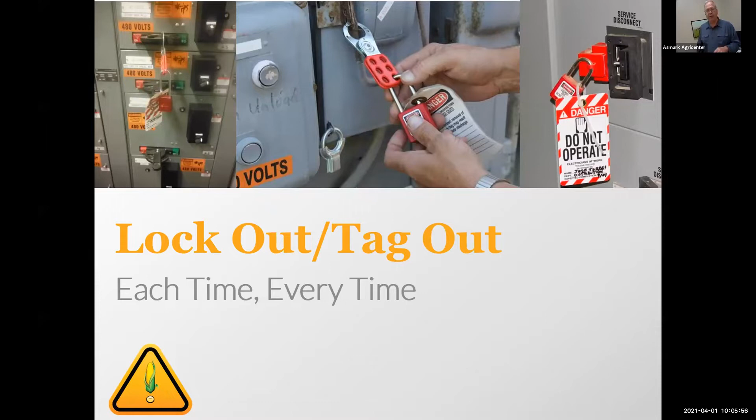So here we go. Lockout, tag out, each time, every time. Lockout, tag out saves lives. It can be used at home, it can be used at work, it can be used anywhere and everywhere. It's so basic and it absolutely makes a difference, so everybody can do it. So once again, this is my information. We're going to explain lockout, tag out, when it should be used. We're going to explain the concept of one key for one person. We're going to describe all the basic steps, working through all that.

It falls under OSHA 1910.147. It's about protecting our employees. I always worked under that part that says everybody goes home at the end of the day, and this works. It makes a difference.

We also do our written procedures. Once again, information—everybody needs to understand how the process works, and everybody's on the same page, so that when they see this happening, they all know what's going on.

It's affordable and very easy to do. It's not big dollars. It could be something as simple as if I didn't have the right thing with me—if I had a heavy duty zip tie and a piece of paper, I can make a lockout tag out. It's something that makes a barrier for something to be turned on.

It is mandatory for commercial and non-exempt farmers, and it is a best practice. It protects us against injury, against unexpected startups during service and maintenance, or anytime we might be working anywhere near exposed electrical. And it keeps others from turning machines on.

How common could it be for us if we're working on something and have to make a repair—we shut the machinery off and go start our process, and if I didn't secure it, how possible is it that someone could walk in and say, 'hey, we're supposed to be unloading grain,' and start flipping switches, and things happen because it wasn't secured? Then we get in trouble, and somebody gets injured. Lockout, tag out—it controls hazardous energy.

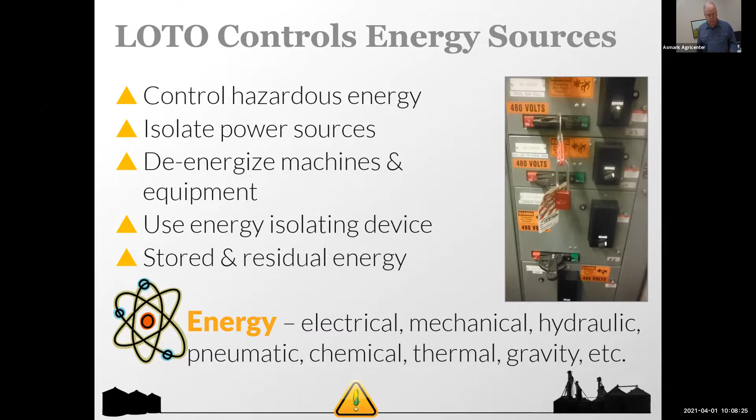A lockout device is defined as an energy isolation from a system, machine, or process which physically locks a system in a safe mode and prevents energy from getting to it. If I disconnect the electricity and lock it, I then prevent the electricity from energizing that equipment to make it move. That's what we're looking for.

So this is a tag out. Tags are our warning device. This tells us why that lock is on there. It's a labeling system—it can say do not operate, or power cord's locked out, or anything. The whole point is that something can't be accidentally turned back on when somebody's working on something or has their person in a dangerous situation.

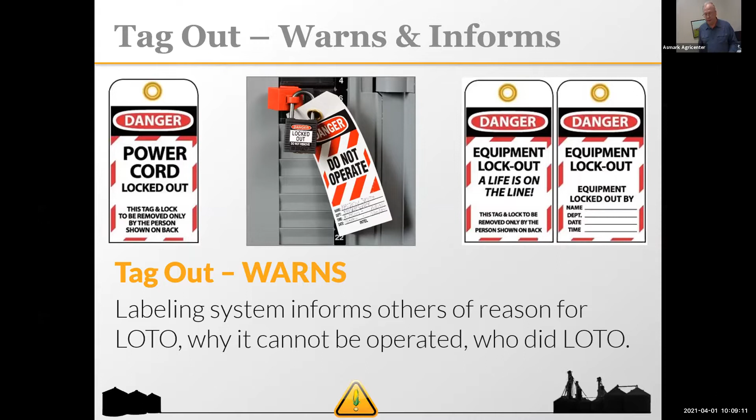It also says who did the lockout. We want only authorized employees to perform a lockout tag out. If I've got a person on his first day of the job who's just now starting to learn everything, he wouldn't be the authorized person to do the lockout tag out. It would be the seasoned employees, but they're learning it too.

We're going to train all of our employees. We want everybody on the same page. It's very critical that everybody understands when they see that red and black tag that there's a reason for that. We always use proper locks and tags, and we also have written procedures so that everybody's on the same page.

Every year, sometimes it feels like we're preaching to the choir, but above all, we want to review those procedures annually, because now and then we need to make protocol changes if systems change or we've changed machinery or there's something specialized with that. We want to make sure everybody's up to speed.

We also work under the auspice that one lock, one key, one person. I have my lock and I have my key. So if I'm locking out, I've secured it, okay? Nobody else can unlock that padlock except me. The importance of that is if I'm in a dangerous situation, or I've locked a piece of equipment out to work on it, only I can re-energize it to put it back into procedure, okay?

If I have a multiple person deal, if I'm working, once again, I come from the fire side, I'm the rescuer, so I may have 3 or 4 rescuers working in a situation. If I've got 3 or 4 people working in a bin or around machinery, there's going to be 3 or 4 locks, depending on how many people are going to be on that device. It will not get re-energized or reactivated until all of the people are back and accounted for. So I hope this helps make things understand how it's going. But once again, it's 1 lock, 1 person, and if it takes a dozen, it's a dozen, whatever it takes. That's critical.

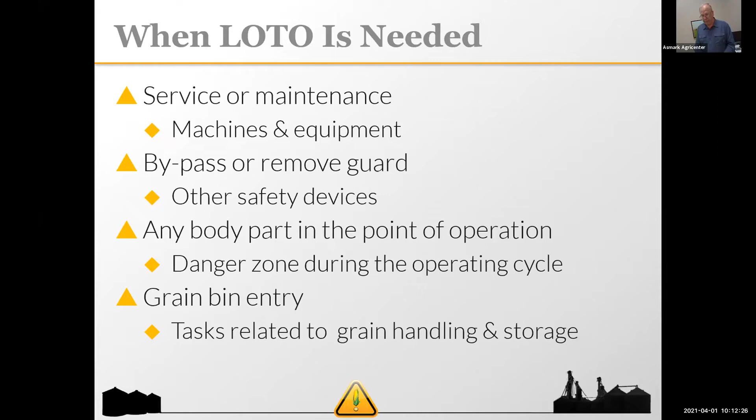If I had to put any part of my body in a position where it can come in contact with pieces that can move or anything like that, lockout, tagout works. And especially in grain bin entry, if we're going in, we're going to lock out, tag out, because our first goal is to stabilize, make the grain stable, so that machinery cannot accidentally turn on and make grain move and get people into danger.

No lockout, tagout, limited exceptions to not using it. We're not going to go into that because we're going to work on this, but it could be as simple as if I had a drill or something working on an extension cord, I can unplug it. And as long as I maintain control of that cord, I've essentially done lockout, tagout. And I dated myself in a program one time when I said, how many of you unplugged the drill when you changed the bit in the end of it? And a student said, I didn't know drills had cords. So, I've once again dated myself. So, and I am sometimes referred to as the poster child for everything you should never do. So that's why I'm in this.

We want to do that. Or if I have something that cannot accept a lock, once again, something that's got a cord or something, but I can control it, lockout, tagout each time, every time. We just get right into the habit of, if this has to happen, this is where we go, and this has to be done before we move on any farther. And any employee, if they see this trying to be short-circuited, has the obligation to each other to call it out and stop the process.

So if we're going to do a lockout, say we're at a process, we've got to go in and change a motor on a system, adjust belts, who knows. We have to identify the energy sources that we're going to lock out. And then we also have to notify all of the people who are affected by this lockout. If we're going to shut down an unloading system in a grain elevator or a processing plant or in a factory where you've got machinery working through automation, if I've got to shut part of it down, it's probably going to affect everything downstream from that. So everybody needs to know that this is going to happen. And that way they're all affected, and everybody realizes that from this point forward, they're doing this.

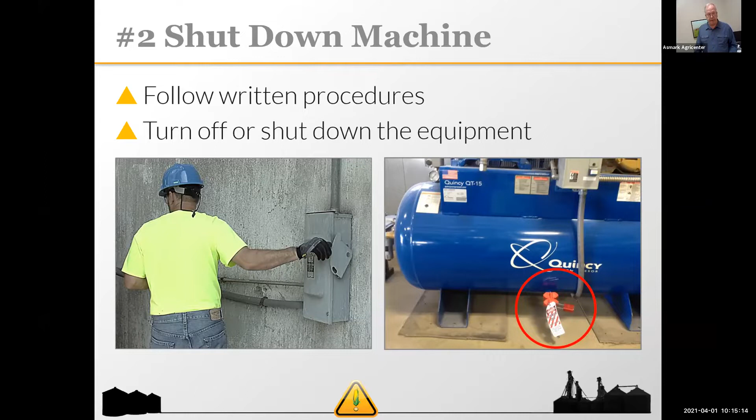If you look at the slide on the right-hand side, you'll see they're bleeding air pressure off of a tank from a system run by air pressure, stabilizing and locking the machinery out. So once again, why are we looking away? We very much do not want that arc. If it should arc, we don't want it to blind us or hurt us.

Now we've isolated it. Number 3 is to isolate the energy source, disconnect any and all energy sources. We can put a chain on something if it's a valve or has a wheel. On the right-hand side, you can see we're bleeding pressure, releasing stored energy. The stored energy could be anything like grain in a leg—if a leg gets plugged and you unplug it, it could run backwards, which is an example of stored energy where things can happen.

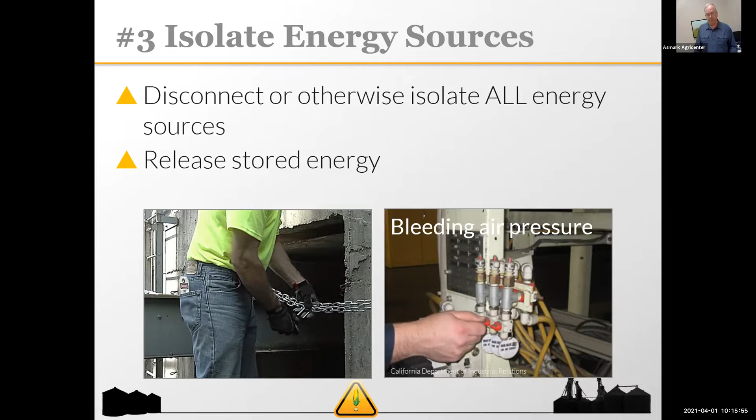Here we are once again, mechanical. Things are under tension, hydraulic under pressure, pneumatic under air pressure, and then just plain gravity pulling down on the items. These are all stored energy examples that we need to be cautious of and aware of.

Other examples: battery backups, springs, struts, like on vehicles, capacitors that can hold electricity, flywheels just from their momentum, gravity, hydraulics. All these items are energy that can have stored energy.

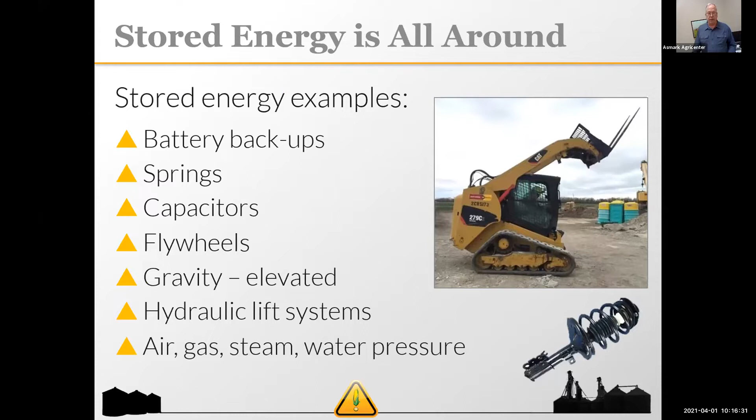So we want to release it, dissipate it, and once again, grounding, repositioning, bleeding and all that. We want to get that pressure taken off so that it becomes a neutral, non-issue.

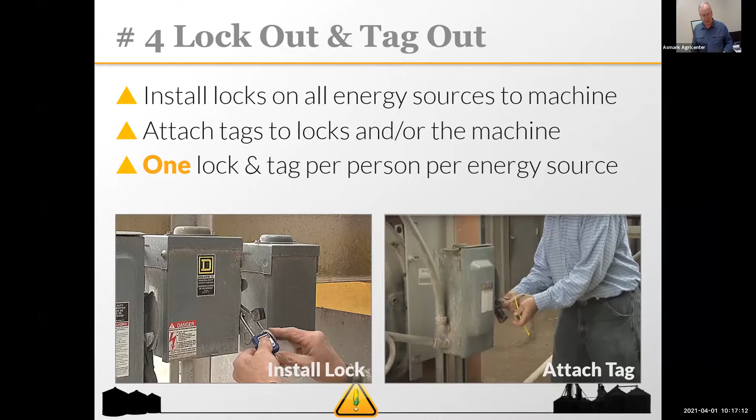So then we install our locks. This is number 4 in the procedure. We install the locks. In the newer systems of today, the tag is actually a part of the lock itself, which helps us identify it. We attach the tag to the lock saying who locked it out, why, and what's going on. One lock, one tag per person—if I've got multiple people, we're going to have multiple locks.

Then try it: make sure that if we've locked it out, we have stopped the energy source, attempt to restart the process, and verify that it's locked out. That, in industry, needs to be watched very carefully.

Once we've proceeded with our lockout tagout and know that everything's stable and secure, we can begin our maintenance work. We go in, make the repairs, make the adjustments, whatever it is. We come back out and account for everybody and all of our tools. Everything is in place, the equipment is back intact, and then we can start the restart procedures.

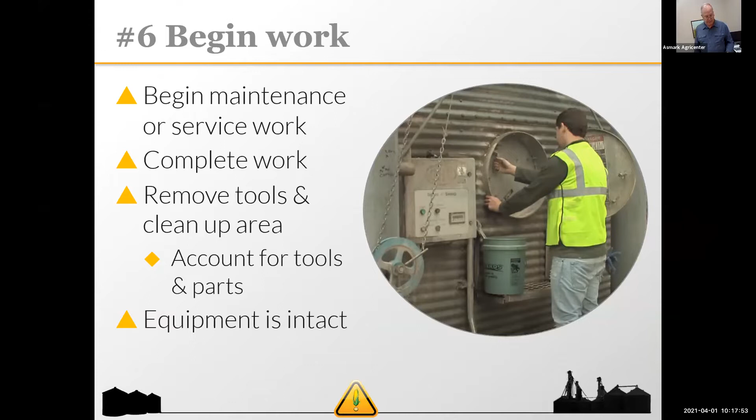We notified everybody when the equipment was going to be shut down and inoperable. Now that we've applied everything, we could then go back and start re-energizing and bringing everything back online. So it's really a procedure.

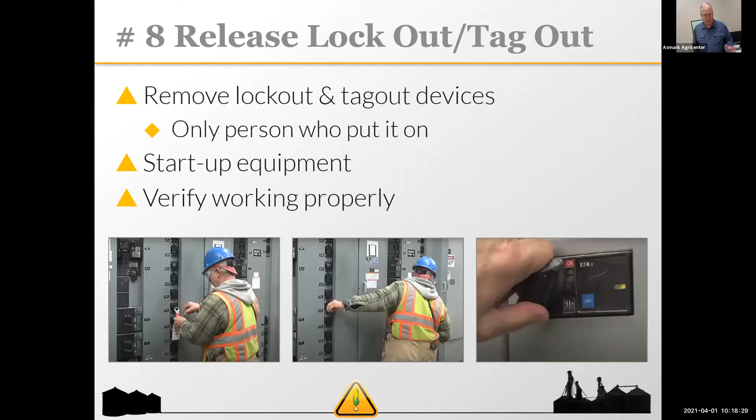Once again, we notify, we do the work, and now we're notifying everybody that we're coming back up. We ensure that everybody is in a safe position so they don't get surprised by the startup—everybody needs to know. We take off our locks, which starts the equipment, and verify that everything's working properly.

The other thing that's very critical here is lockout tagout devices are specific for lockout tagout. We don't use padlocks from lockout tagout to secure our lockers or anything personal. These are in place for a reason, used specific to this. They are provided by the employers, standardized in their colors and shapes, and very durable for indoor and outdoor situations. We want to understand that they're tough, but most of all, specific to one job only.

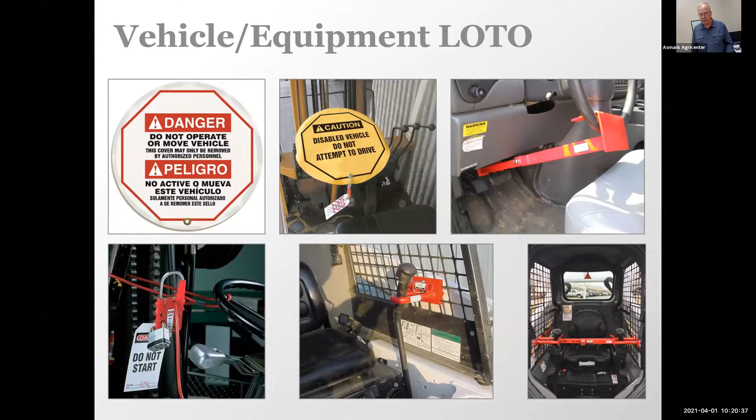Different devices here that lock between the pedals. You can see barriers that say this vehicle is out of service, and it's very obvious. Lockout and tagout devices are very durable. They are standardized in print and format, so every time we see it, we recognize and understand exactly what it is.

They take a pretty fair amount of force if somebody tried to tear it off. Some of them are not reusable and are self-locking; the unlock strength is 50 pounds on that. But the point is, if it's there for a reason, don't mess with it, and the person who put it there is the one to talk to.

So once again, our control program: lockout, tagout procedures. We want to train our employees so everybody's up to speed. We do periodic inspections, enforcement, written procedures, and full employee protection. That's our bottom line, protecting our people because they are our biggest asset and resource.

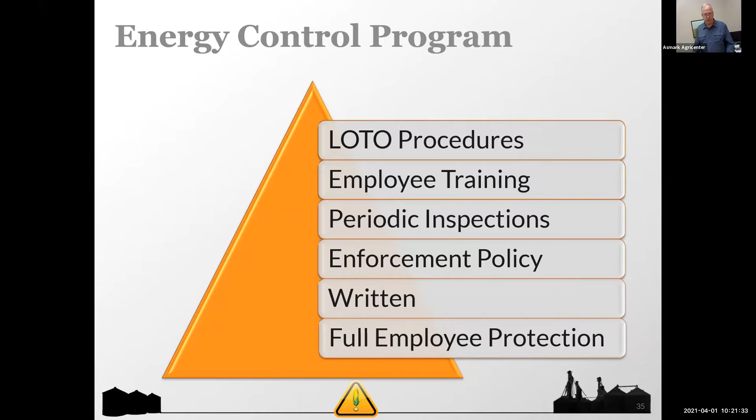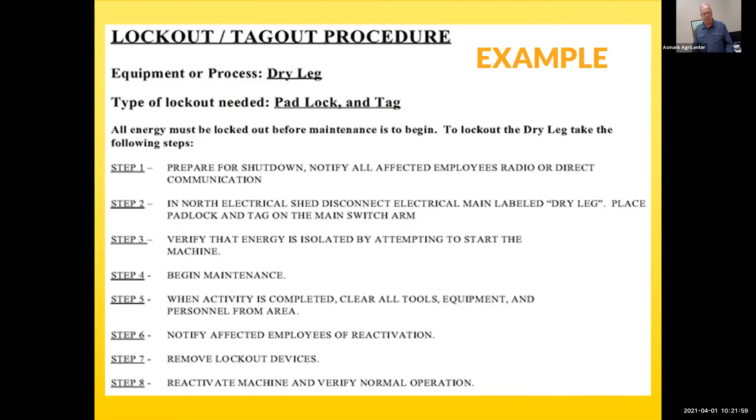Once again, in the North Electrical Shed, this is just an example of a lockout tagout, showing what they're going to be doing, where and when and how. All workers need to be trained on this, so everybody's on the same page, whether it's a 20-year employee or the new kid on the block. It all plays that way.

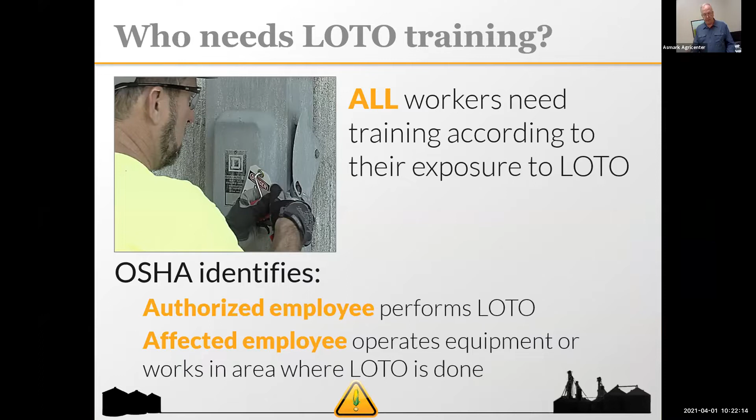Authorized people, affected employees, this all plays into it. Whoever works with it needs to know how the systems work, however they are specific for you, your operation, your business, whatever. Okay, procedures, we're just reiterating here once again.

Once again, we train our personnel on the areas where they're working. Understand, this is how you would lock your part out here. Recognize the hazard, the energy sources, the types and magnitudes, how to isolate, and what method or means I'm going to use to do the lockout, tagout.

Do I use a padlock? Do I use a blank? Do I use cables? What different things do I need to be able to do this?

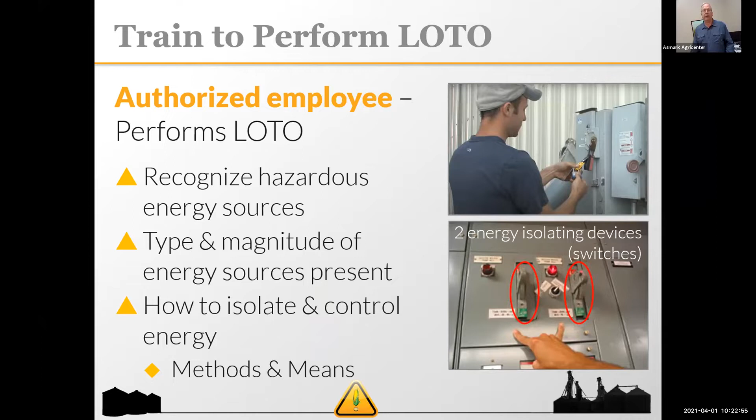We also want to retrain, say somebody's in a job position and takes a different position, moving into a different part of the facility. We would then want to train them on what lockout, tagout things they need to do specific to where they're working now. So it's retraining anytime a job would change.

Periodic inspections, once again, we're inspecting our properties and all that. So we may have to do lockout, tagout when we're inspecting part of our equipment and things like that. So all these play right down here, identify and correct all those procedures.

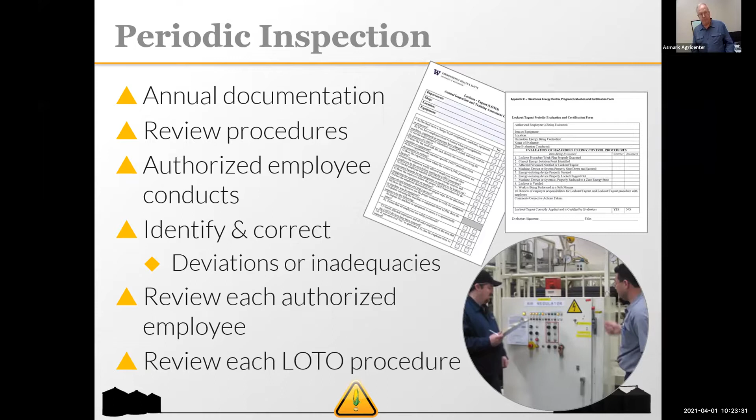So why lockout, tagout on the family farm? Once again, a lot of farm injuries happen out there. We have a father and son who discussed the need to check a cross auger on a bin.

Nobody thought about lockout, tagout. So the dad went to check the auger and didn't like what he heard. He got on top of the bin and stuck his arm in the auger. The son decided to start the auger and the father lost his forearm. Once again, bad communication, no lockout, tagout. A simple padlock would have saved this man's arm. It's just that simple.

So lockout tagout is a small change, but it has a big impact. It doesn't take much to do it. It's not expensive, but everybody goes home, and that's our bottom line. That's what we're after.

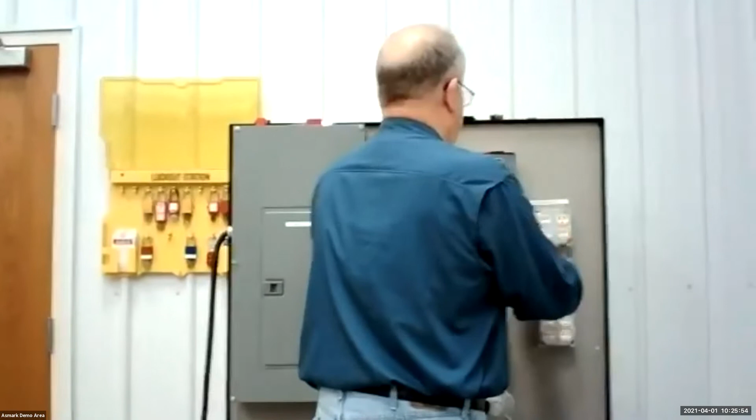What we're demonstrating here is a device in a machine operation. We've got a dump pit auger and the grain leg. So we're going to start them up, and we notice that we've got power. So we shut it down, we stop it, we come over here to the motor disconnect and pull this down. I install my lock through the part where the arm can't move.

And once again, that was a bad procedure. I should have been facing away, that's my call. So once again, I go here and I lock out, tag out. Now I try it out. Nope, I didn't get everything. So now what I've got to do is go to my second point of entry.

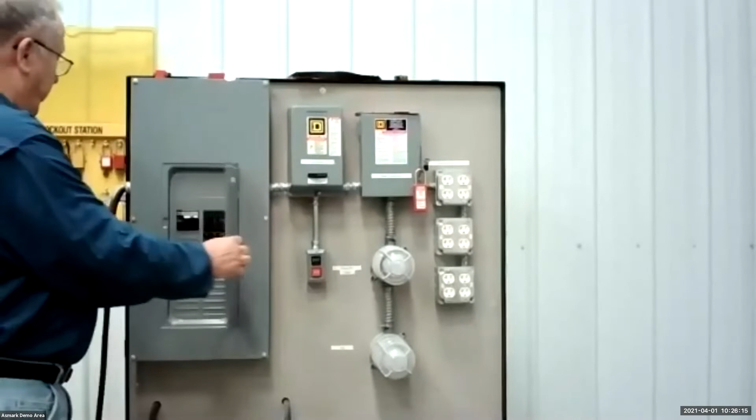I go in here and I shut off this one, I think it is. My lock device goes on the breaker. You can see here, it goes on snugly like so. This comes over, my padlock goes through here. Notice the padlock has a tag, it says locked out. So we now have everything taken care of, our energy sources.

So we now have everything locked out, and now procedures can go on from there. This pretty much concludes lockout, tagout. Once again, I want to reiterate to everyone that it's easy, it can be this simple. This is what saves lives. This is also inexpensive, and keep everybody on the same page, because the bottom line is everybody goes home. So thank you for your time.

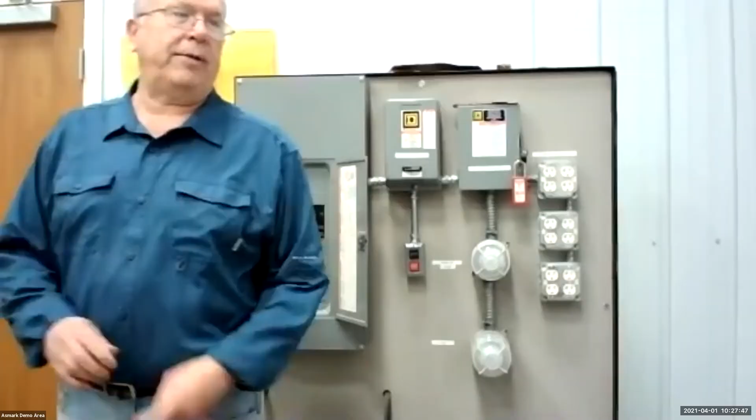So there's just a general comment on one of the pictures about the person should be standing to the right, not the left, of a particular breaker, just in case the door blows off, his arm would get hit. Sorry about that, be something like this. Okay, my mistake, that was my mistake in the presentation. Sorry about that, good catch. Nope, that's okay, everyone. And you know what, that's why we're all here together today.

Somebody was asking, does anybody else have a hard time getting employees to use a lockout tagout system? They said their crews in small groups usually have to go through it two to three, four times, or ask to convince them to do it. And somebody brought up discipline. What are your thoughts on that, Dave? If they ever lose a coworker, or if I was the son and my dad lost his arm, lockout tagout would be very, very, very important to me. So it may seem like you're just preaching to the choir, but keep preaching, because the safety of your employees is critical, and you need to make it as stringent as you need to. But above all, we just got to get them to buy in, because it's their lives and their safety, and it's just that critical.

What do you think about the discipline part? I would leave that up to the companies themselves. If I've got a person that just doesn't buy into it, I'm going to train them till they get sick of it, till they do it. So I'm not going to say discipline is up to them, but I'm going to train them to where they understand my expectation is you are going to do this.

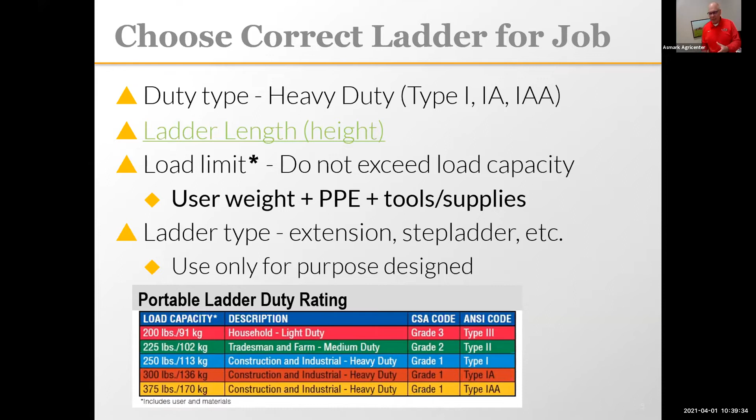Ladders are designed for a certain purpose. Our ladders are designed to take vertical loads, as you see on this slide. They are not designed to take horizontal loads, so we don't want to see a ladder used horizontally as a scaffold or a pickboard, something of that nature.

We also will look at step ladders. We're going to see where people like to use step ladders incorrectly. They try to use them as an extension ladder. The step ladder is not designed to be used as an extension ladder. It's designed to have the spreader bars locked out and used as a step ladder.

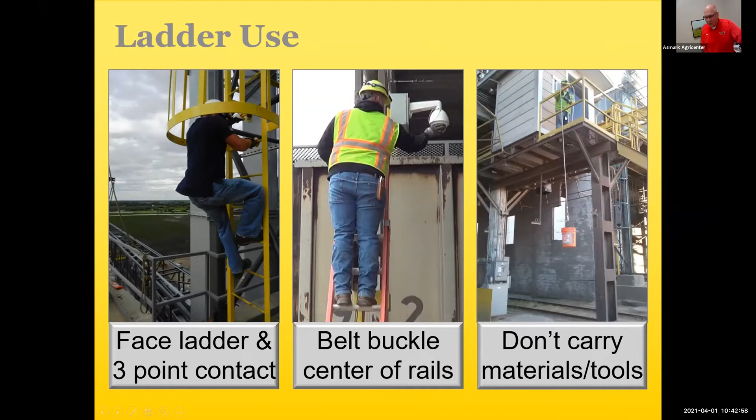Carrying tools, we lose that 3-point contact and grasping control if we're grabbing a bunch of tools in our hand, because now only one hand can be used. Consider a 5-gallon bucket, put your tools in there, and once you get up there, haul it up. This is a great picture because you're behind a guardrail, so you're protected from a fall. But also consider the use of tool belts.

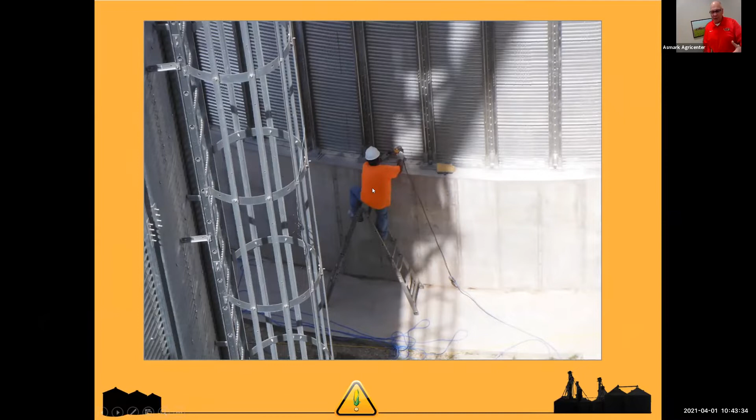Here's a good example of working on a grain bin where we've got a step ladder, and probably not the right ladder to use for this situation. The reason is he can't do his work properly while facing the ladder, so now he's using it incorrectly, depending on the type of step ladder. Some step ladders allow access from both sides, but that's determined by the manufacturer. So we should consider whether to use an extension ladder instead. Also, we never want to straddle a step ladder when using it, because we lose stability when we use the ladder in that manner.

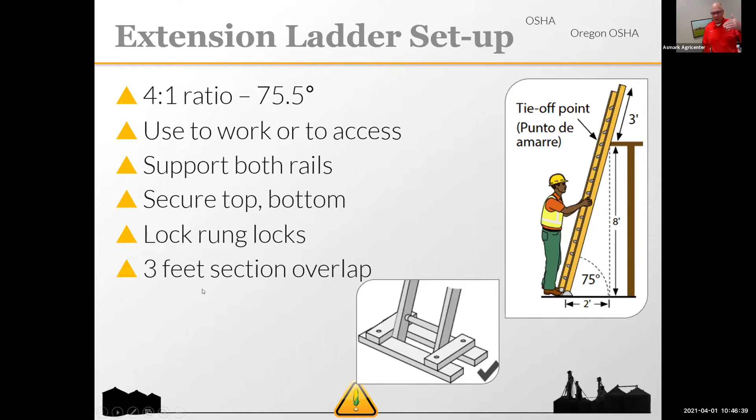If we're using an extension ladder, we want to make sure those rung locks are locked in place, both of them. And if we're using the extension to access, we're going to have a 3-foot extension, and the two pieces should overlap at least 3 feet so we have good support. Usually your ladder labels will tell you where to go on that overlap of your two sections.

So here's the 3-foot extension I was talking about when using the ladder to access - I've got something to grab onto. Another thing we want to make sure of is once we get up on this roof, we've got fall protection for that worker once they're up there. They make nice devices where you can walk through your extension ladder with a locking gate that automatically closes behind you and gives you fall protection - guardrails on the side, that kind of thing. So making sure we have fall protection if we're using that for access.

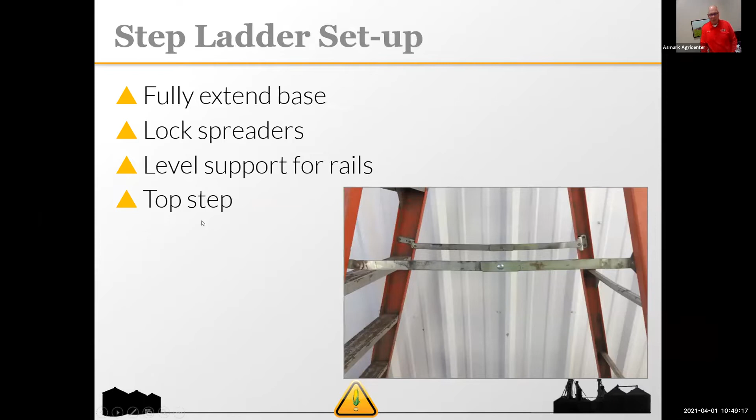Okay, our step ladders - we want to make sure we fully extend the spreaders. We never want to step beyond the top step of the ladder. We'll show you what we're talking about when we look at our demonstrations.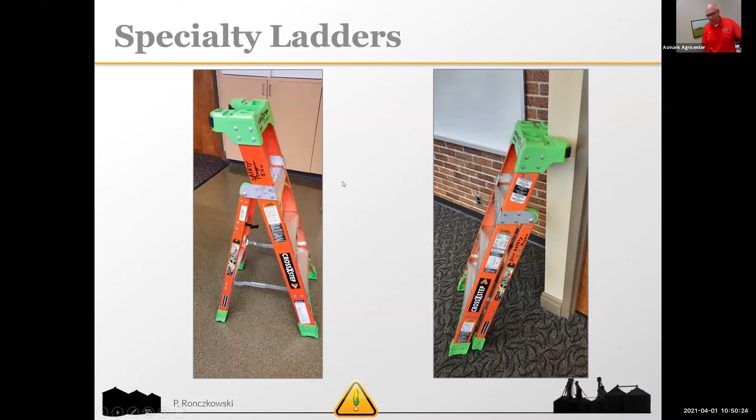Now I show you this one because there are special purpose or specialty ladders out there. This is a type of step ladder where the cross step can be used as an extension ladder, as you see here. It's designed to fit on a corner, as you see in this picture, or it can be laid up against the side of a wall to be used. But that's a specialty ladder that is designed and approved by ANSI to be used for that.

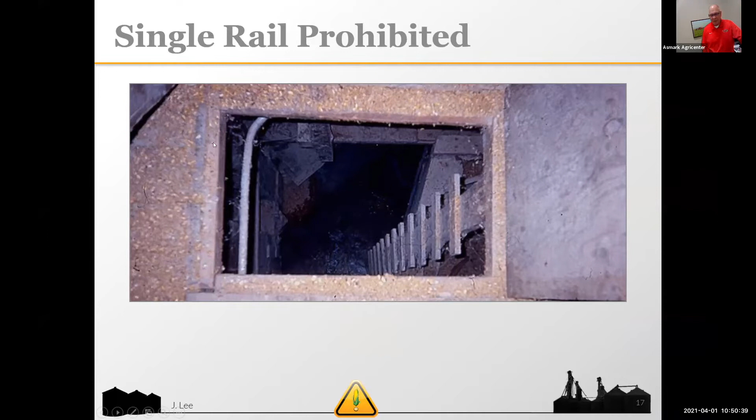Single rail ladders are prohibited. As you see here, this wood ladder, these are prohibited. They are dangerous — our feet can slide off the sides here as we go up and down these things. And this was taken from a grain elevator.

Ladder storage, very important. We want to keep our ladders away from heat, sunlight, and moisture. It can affect the integrity of the fiberglass as it's exposed to the weather. Having brackets to prevent any kind of sag and having them stored vertically and secured is the proper way to store our ladders.

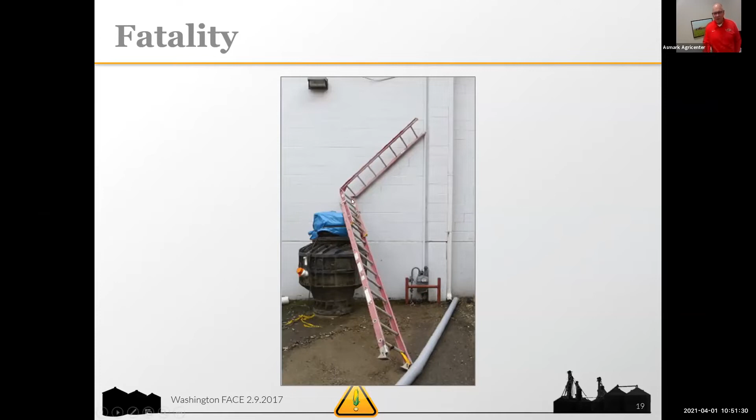Here's an example of why we want to store our ladders in a good manner, in a good area. This was from Washington FACE — they investigated a fatality where this fiberglass ladder had been stored outside for many, many years. It affected the integrity of the fiberglass, and when the worker went to use it, as you can see here, both side rails shattered, collapsed, and he fell to his death.

The final thing I wanted to mention is a little bit about fixed ladders, because I've run across farmers who are wondering, like, we're building some new grain bins and we don't see these fixed ladders on them anywhere — we're seeing stairs or stair towers instead. And that's because we are phasing out the use of fixed ladders as we currently understand them.

If the fixed ladder was installed before 2018, you can still use it up until 2036. At that point, you have to have a ladder safety system or a personal fall arrest system on that fixed ladder. But many manufacturers are already anticipating that and not even using fixed ladders — they are going straight to stair systems.

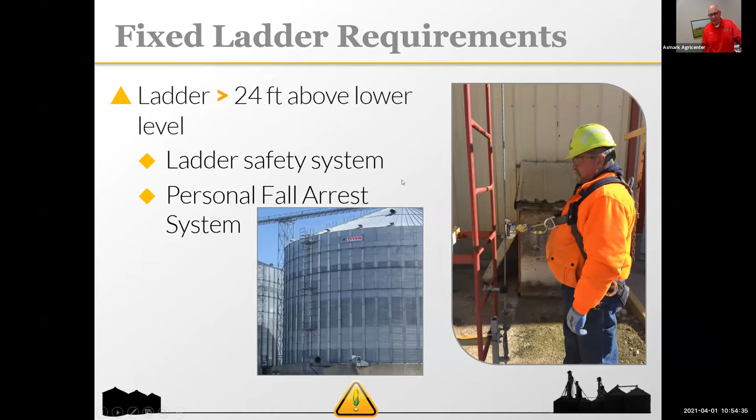Personally, I don't think you're going to see that much in the grain industry, because for a personal fall arrest system on your ladders, you need an anchor point above you and a self-retracting lanyard in order for that to work right. What you're going to see a lot of are these ladder safety devices, ladder safety systems, which we're going to talk about. So here's what we see most of — as our new bins are going up, it's stair towers or stair systems to access them.

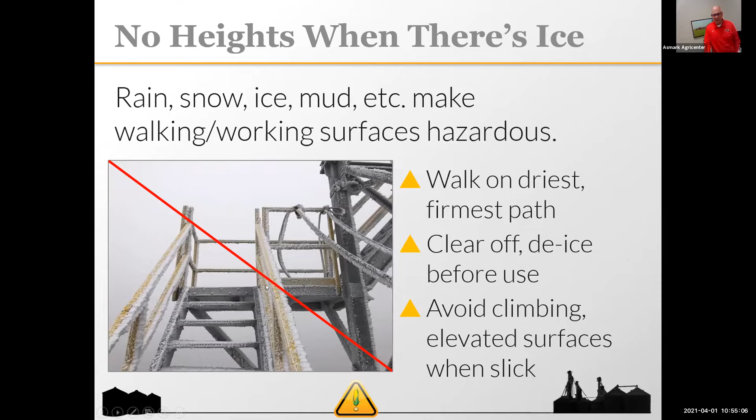Final couple of slides here. Even though we have stair systems, which are much better than using a ladder, we need to be aware not to use them when there's ice. Make sure the treads are graded so water drains off. Always use handrails on stairs, don't skip steps, and take your time going up and down, and you'll be in good shape.

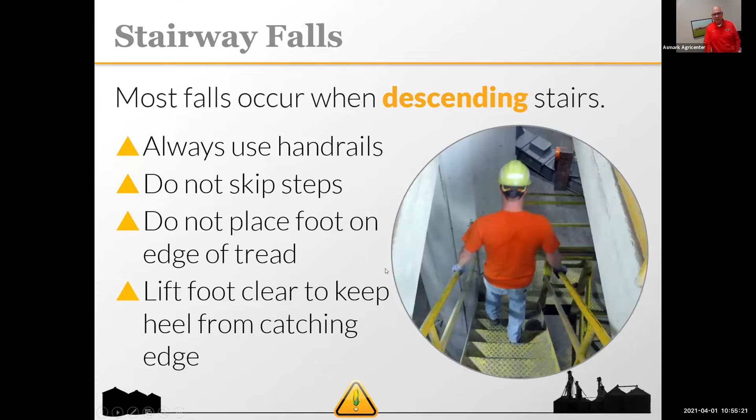Okay, so we're going to move over and take a look at a couple of things in the other room here, and we'll see you in a couple of minutes.

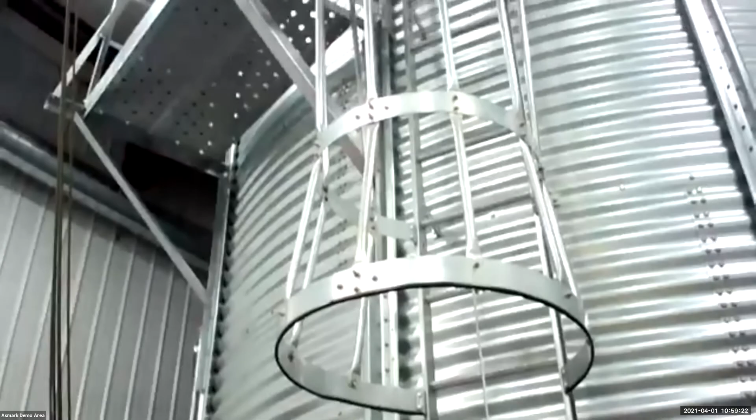Over here we're going to do our little demonstration. Here is a ladder safety system, and as you see, we've got our cage on this fixed ladder here. The system allows you, when we hook John up to this thing, to move up the ladder, but if he were to fall or slip, it's going to catch him. It's got a two-step locking mechanism carabiner on it so it doesn't pop out while it's attached to him. Also, when you install your ladder safety system, you can keep your cage up here, you don't have to take it down. So we're going to get John on this now, and attach him to it.

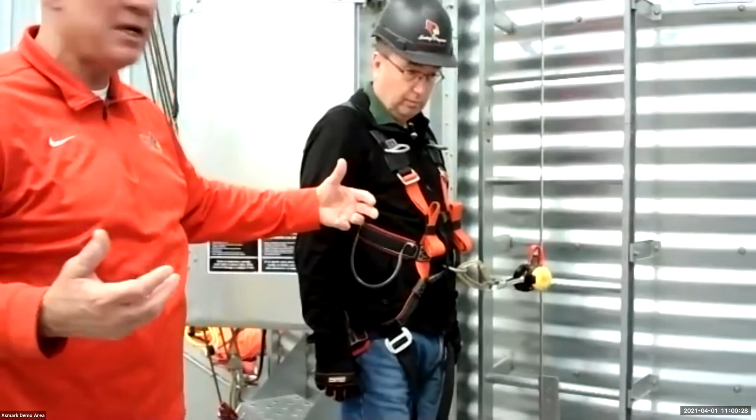As John's attaching this, you're going to see he's got a proper harness. We've got our other safety equipment on as needed, gloves for good grasp. And notice that we've got some work to do, so we have the ladder safety system in place. We need to make sure everything's in place, the body harness is on, and the worker knows how to use it. If we don't have to use this system, in other words using stairs, that's just a bunch of stuff we take out of the equation. So if we can have stairs, that's a much better system.

All right, John's going to go up and show you how this works. So he slips. He slips off it, and you can see he's hanging there.

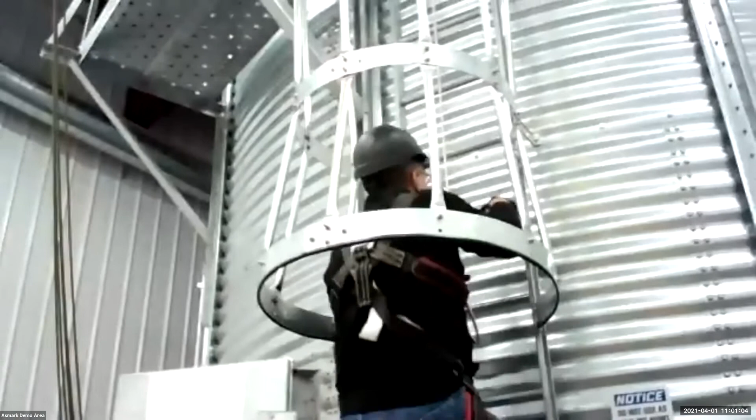Anything else you want to add to that? Cable tension, make sure the cable's in there, make sure it's in proper tension. When they install this, you're not going to be installing these on your own, you're going to have a company in here, because if it's not tensioned properly and you have too much slack, it's not going to work properly. Okay, that's it.

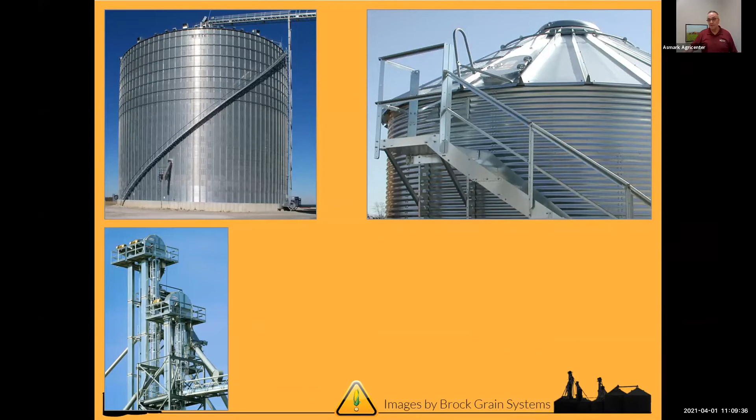Just going back on the last presentation with Paul, I was talking about some stairways and some ladders, platforms, and when you look at the legs, you've got ladders and platforms and everything else you have. So not to spend a lot of time on that.

So out in the demo area, we have a sweep auger out there, and they're going to show it on a camera for us. Basically what we're looking at here, some of the things to be concerned with sweep augers are unguarded. Also the small ones with the wheels on the ends of them, you got to watch for them. Once they start wearing down, it kind of gets to the point where they won't pull themselves. That's where people start kicking them. And when people start kicking them, that's when their pant legs get caught and we start seeing fatalities and or possibility of amputations and everything.

Flighting on these, especially after they've been used for a little while, gets very sharp. The equipment guarding is based on the picture you see in the video. You'll see the handrail in place, and you also have to have that snow fence or something of that nature.

What that does is keep a person's arm from going through and getting into the sweep auger itself. Down on the end of that, you'll see an area that's covered and also has a handrail around it and netting as well. That's your sump guard.

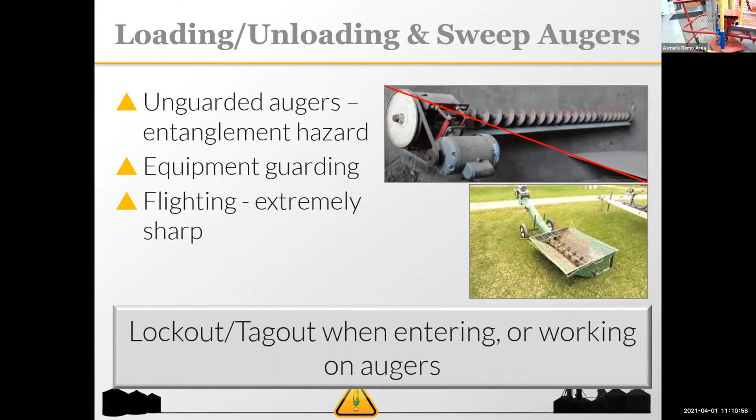So your center sump's going to be covered in that. Anytime you're working on these things and going into these bins, you want to lock those out. That's going to be a common theme you hear throughout all these different items when we talk about equipment: locking out.

This is where people get injured and are killed, because that auger is going to run, and it's going to move whatever it moves, whether it's a kernel of corn or whether it's your foot. So you want to make sure that you keep your guards in place for those.

When we look at augers, one of the other ways to do it, we have augers that load from the outside, and augers that load the trucks from the bins. A lot of these, for Monday, I think Aaron Yoder was talking about different augers, and one of them was electric, and then we have some that are PTO driven. A few other items are PTO driven too - you may see it on a post hole digger, your mowers. There's a garden variety of different things that run from a PTO shaft.

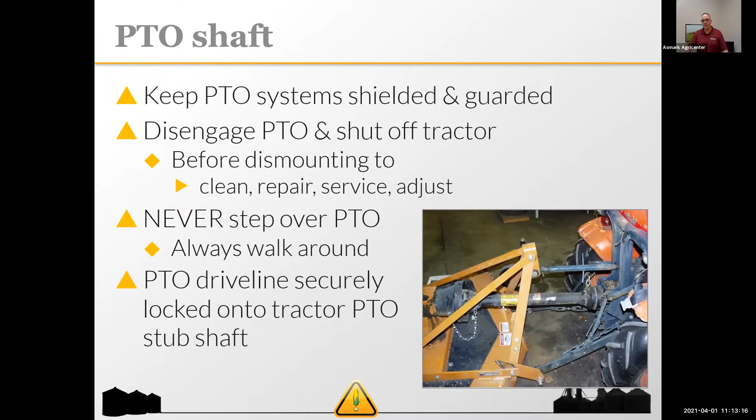So the drive line has to be securely locked onto the tractor PTO stub shaft. You've got to make sure those things are fully locked in place, because if they fall off, then you start having other issues, and your exposure goes up as well.

Any machine part that rotates, like shafts, rods, etc., will wrap your clothes up in the direction it's turning. Now, the more damage on the shaft, you get nicks and cuts in it, and you'll start getting little tags that'll grab your clothes. The end result is, if it grabs your clothes, you're not going to have time to react.

So PTOs are the most common machinery hazard that we see on farms, and that's something we want to make sure that we take care of.

Now, when we talk about the PTO stub, this is actually going to be this area right here, if you can see the pointer there. That transmits the power from the tractor to our equipment. At 540 RPMs, that thing's rotating 9 times per second. And at 1000 RPMs, it's rotating 16.6 times per second.

So you want to make sure you have that general guard over the top of that, as long as the guard on the shaft itself, and that's going to be considered your master shield. Basically what that's going to do, you don't want to step on that, because it's the same thing with a guard on an auger. You don't want to step on one of the top covers from an auger, because it could fall through, or you could have another situation. Then you're exposed to the rotating shaft.

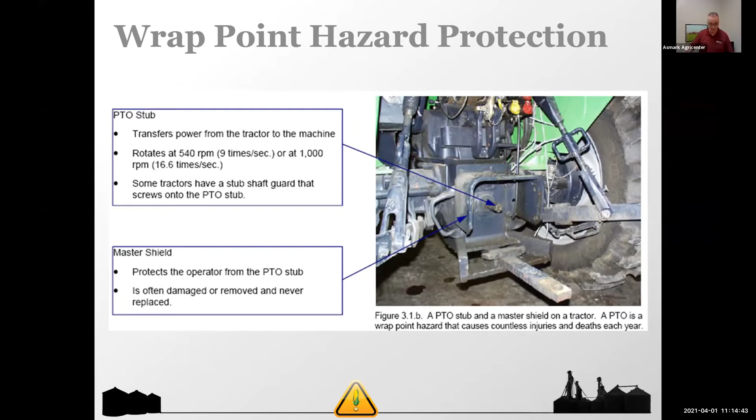All right, so where we talk about machine hazards and where they occur at, if it moves, basically it can cause an injury, and it's got to be guarded. So you got point of operations, power transmission apparatus, and other moving parts.

Point of operation, this is actually where the actual work is performed. You think about like power presses and that kind of stuff. You have like a die or something of that nature. That's where your actual work is taken care of. And it's also a pinch point.

Your point of operation on your grinders up here, you'll have guards on the end of those, and all the platforms and the tongue guards and all that stuff. There's a reason why those things are supposed to be smaller openings, and that's if your wheel blows up it contains it within that guard.

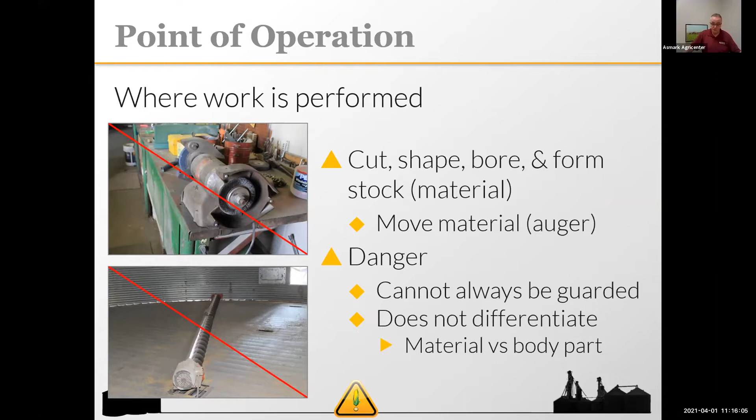Sweep augers, again, we see those augers with the guard across the back. It's basically a cover. Add the handrails and the fencing, and that'll keep anybody from getting their hands in it. And preferably with a 7-foot long dead man switch, you can actually turn it on and off with that. That also helps for keeping you away from that piece of equipment.

So when we look at machine hazards, pinch points, wrap points, pull-in points, shear points, crush points, there's a garden variety of them. If it's a piece of equipment that moves, you can see a problem with it, right? So the one that you see in the picture right there, I go by grain bins all the time out in the country.

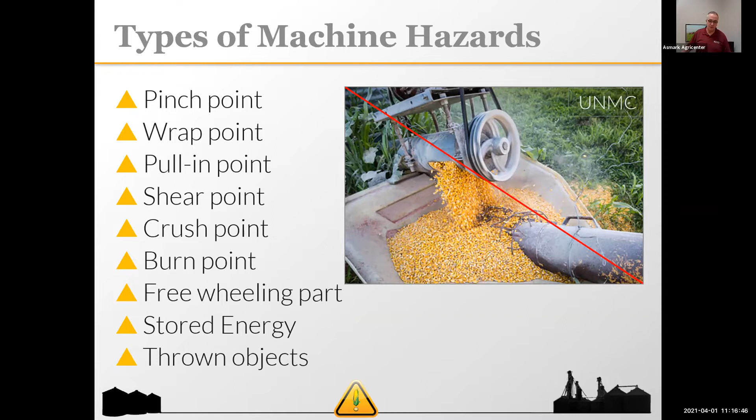And if somebody has to change a belt on that thing, what they do is they take that guard off, and then instead of trying to put the 4 or 5 bolts back in it to secure it, they just leave it off. And if you walk by that too close while it's running, your pant leg can get wrapped up in that just as well as it does with like a PTO shaft.

All right, so mechanisms that take crops in or material for processing would be conveyors, feed rollers, feed chambers, grinders, harvest equipment. These are all places that pull in. A corn head would be a good example, a bean head, that type of stuff. So it's not only just going to be your in-plant stuff.

You know, we hear, seems like once or twice a year during harvest, we hear about people getting injured or killed when they're using bean or corn heads on their combines. Shear points, these are something that cuts, it moves fast. You don't really have an opportunity to get in there to do anything.

And then some of those are very difficult to work with and guard them because it's kind of in that point of operation type of thing. It has to be open so it'll work. So you have to guard it in other fashions. And the high speed movement, like in the example of a hedge trimmer, or the old sickle mowers like we used to see, those are actually moving fast enough. It's hard to really see where those blades are at. So it may look like there's not much there and it's actually moving pretty rapidly.

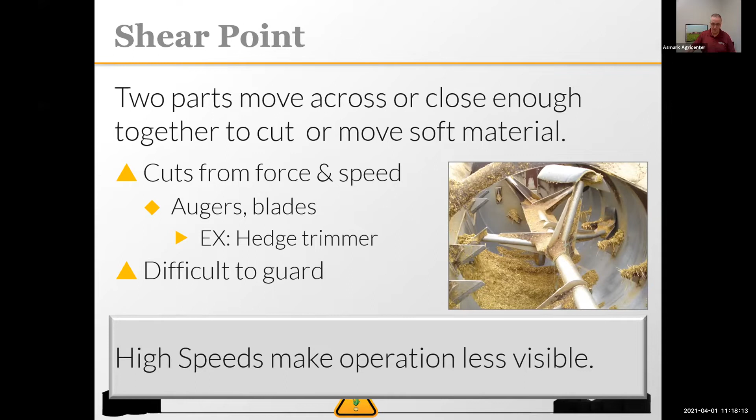All right, so when we start looking at crush points, they come in a variety of issues, like in the dump beds of a truck. I go back to the combines where we have the corn heads and the bean heads. Something happens, there's a jam in it, somebody gets under the corn head and somehow it gets released and it drops down. I believe there was one of those not too long ago. And so these are always things that we got to do to block them.

Okay, so some tractors come now with the buckets. Whenever you look at the buckets, they have a block on them or a lever you can flip over that'll keep them from coming down. They're a little better than they were in the older days. In the older days, if your hydraulics were elevated, you walk by and you touch the lever, it would drop all the way to the ground and nothing flat. Nowadays, it's a little bit slower, but you still have the same issue.

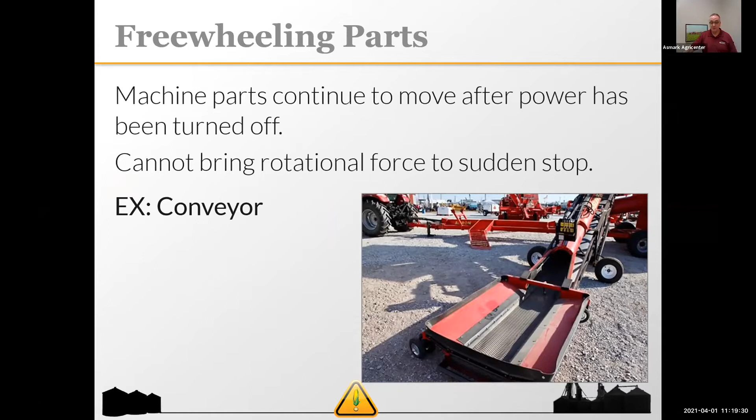All right, so freewheeling parts. When we start looking at these, if the machine's turned off and it continues to rotate or move, whatever the case is, a perfect example would be a fan of some sort. When you shut that power off, it's going to continue to move a little ways, so keep that in mind whenever you're moving around. Once you shut it off, it may take a couple minutes to shut down and quit moving, and you've got to secure it so you don't have another issue. We revert back again to lockout tagout.

All right, so thrown objects. My goodness, there are so many of these that can come out. You've got grinders, you've got materials that get chopped up. The machine guard operates like in a mower - it's made to cut objects and it will throw it out the side or the back, whatever the case may be. So definitely want to make sure you're wearing your proper PPE, because I know a lot of them have chains on them, but if you hit a piece of metal, it can very much fly through those drop chains easily.

And again, on the pinch point as well as confined or stored energy, when that energy is raised and that hydraulic is holding that up - like I said, if you hit the old style lever buckets, that thing's going to come all the way to the ground more than likely. It don't always stop. Some of the newer ones are a little bit better than they used to be, but they are still released. So we want to make sure that we take care of those, block them up, whether it's a lever on the machine that helps block it, or whether you have to use wooden blocks to hold them up.

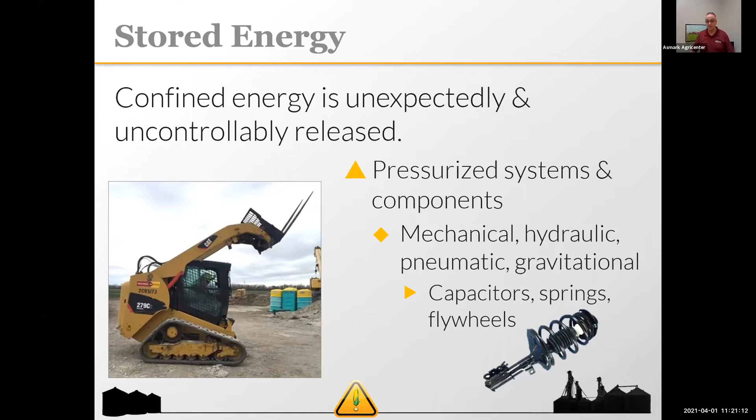Springs are notorious for stored energy. Capacitors, they store some energy once you shut them down. Transformers may also carry some energy after you shut them down. So sometimes you've got to ground those out and let them go before you can actually work on them.

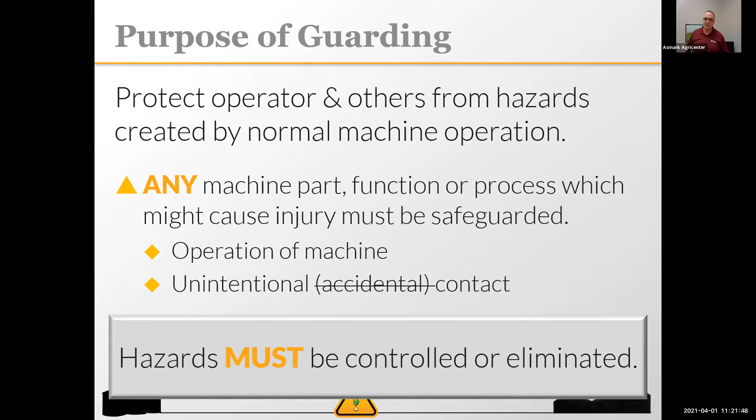All right, so guarding - we'll look at a couple of places out in the demo area again, and we'll see a couple of guards out there. What these guards have to do is protect the operator and others from hazards created by normal machine operation. So if it moves and it can pinch, it can pull, it can cut your arms off, whatever the case, it has to be controlled or eliminated. So obviously engineering out that problem is using a guard.

So how the guard should work: easy access for maintenance, prevent contact. It's got to be secured to the machine so you can remove it, but you usually have to have a wrench or some form of tool so it doesn't just come off easily. It should protect from falling objects and not create new hazards. You don't want it interfering with regular job performance. If you've got bearings behind that guard, you can use grease zerks on tubes - keep in mind you may have to use three pumps of grease versus two, but there's going to be a situation where you can grease that from the outside. You don't have to take that guard off, and every time that guard doesn't come off, that's just one less opportunity for it not to get put back in place. That kind of falls in with your easy access for maintenance as well.

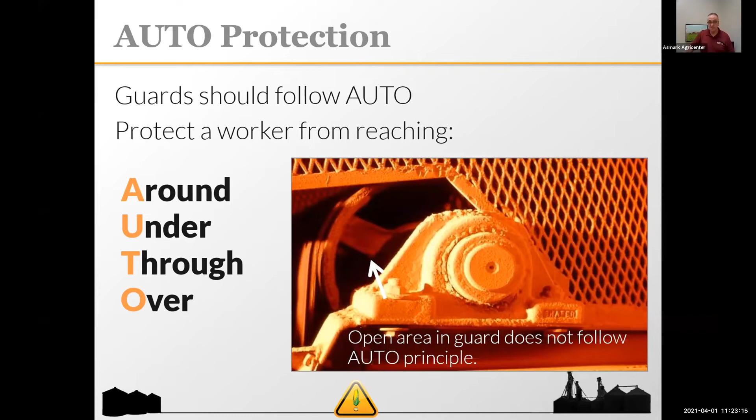So when we talk about auto protection, guards have a requirement that you cannot get around them, you can't get under them, you can't get through them, or you can't get over them to reach the working points. So that pinch point, the belt, the pulleys, whatever that's guarding, you have to make sure that guard is to the point where they can't get under, over, or around it so they can't access that. We'll talk a little more about the distance here in a minute.

Some of the guards that we see - fixed guards are probably your most popular, the one you see the most - those are the ones bolted to the piece of equipment. Six-sided guards completely encompass something like a pulley - you'll have the front, sides, back, top and bottom all covered. Interlocks, we use those when you have one piece of equipment you don't want running unless you've got that first piece of equipment running, so they all interlock with each other.

Adjusting guards - some of those point of operations, that guard moves with that piece of equipment, so it keeps you out. Another way of adjusting is you've got your pullbacks where you push the buttons. You have two hands to operate the equipment, and that's going to be more in a metalworking area than in a grinding area or a grain area, but those are possible.

The self-adjusting are the ones that automatically move with the point of operation. And then guarding devices could be anything. We're seeing more and more of the electronics, like light curtains, lasers that actually, if you break that laser beam, it'll shut the equipment down. So a lot of the electronic devices are starting to become more and more prevalent out in the world.

So when we talked about opening sizes, that's one of the things we covered - when you go with the auto, you have limits of how far that hazard is away from that guard. Subpart O in general industry standards talks about this. Now, if the distance is 1/2 inch to 1.5 inch, you have to be less than 1/4 inch. So if that hazard is 1/2 to 1.5 inches close to that guard, you have to have less than 1/4 inch. Basically, you are not going to be able to get any body parts or tool through that. And then it goes all the way up.

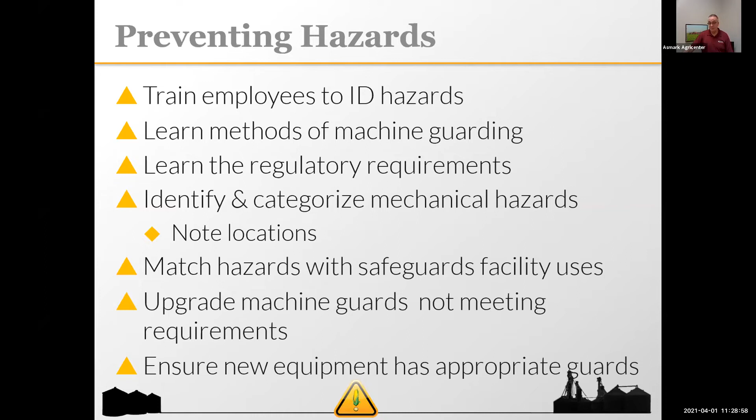Machine guards not meeting requirements, we want to make sure that they are done, get them all rolling and up to date, and make sure new equipment has the proper guarding on it. Sometimes new equipment comes in and it's not really up to OSHA standards.

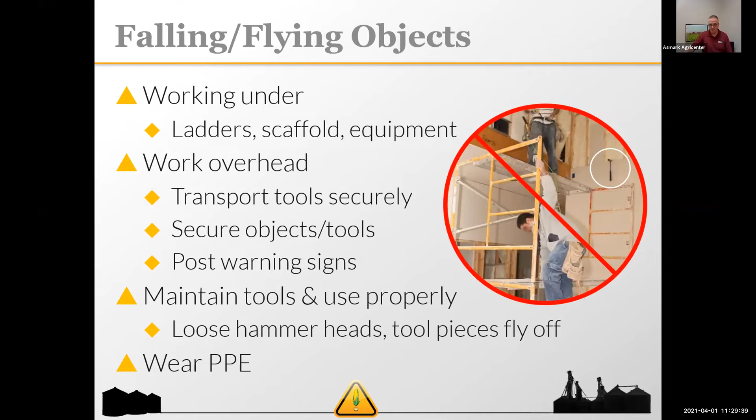Falling objects, we want to make sure that anytime there's objects overhead, you have toe boards on your handrails, put signs up, make sure everybody is warned. And of course, our last protection is PPE versus engineering removal. Working under platforms and scaffolding, make sure the PPE is in place, or you have a net to catch the possibility of objects falling below, or just cover it off and put danger tape up to make sure nobody gets in there.

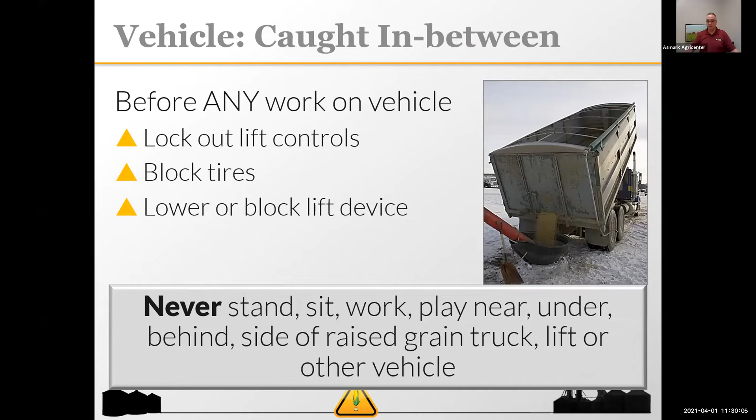Struck by: workers get hit by things from time to time, flying objects, machinery, vehicles. We want to make sure we keep people out of the areas of the vehicles, lock out lift controls, block tires, and never stand, work, or play under, behind, or near raised grain trucks.

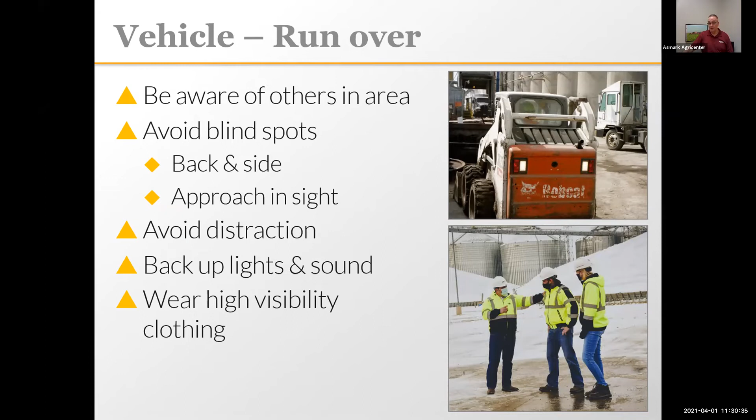We're also going to talk a little bit about getting run over by vehicles. In the fall, whenever we're doing harvest, a lot of our elevator people wear reflective gear because it gets dark early. We make sure that they're covered. Make sure when you're pushing grain piles or bins or flat buildings, you make contact with the operator of the equipment, whether it's a payloader, a skid steer, or whatever the case is.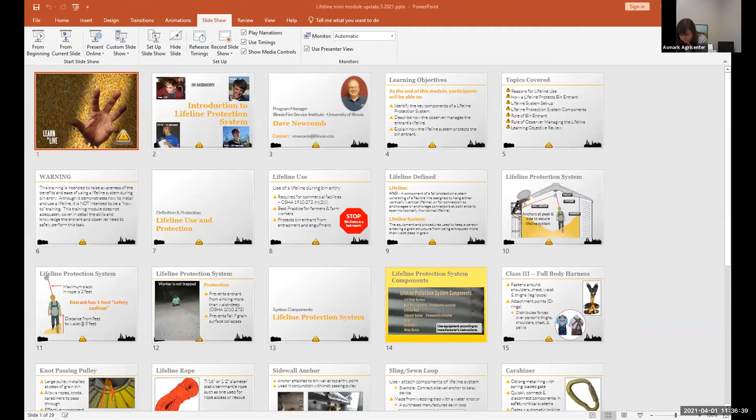I went to slideshow and then from beginning. Thanks everybody for your patience. There we go. All right.

Introduction into this lifeline, and you can see here, these were pictures of young men that were involved in an incident in Mount Carroll way back in 2010. Unfortunately, this is what brought grain bin issues to light on a nationwide scale, brought it together to the media and everybody's attention nationwide. So this is my contact information, so we're going to talk about it.

What we're going to try to cover today is identify the components of the lifeline protection system and how the observer manages it. So this is a two-part deal. Once again, we're trying to break the culture of working around or in bins by yourself. So we'll talk about the observer and then how it protects the individual itself.

So why would we want to use a lifeline? Because if we have to go in, we want to be able to be safe. If we've done lockout tagout, hopefully we've got the grain bin, the grain is stable. And how it protects us is it won't allow us to go more than waist deep in the grain.

We'll talk about how it's set up, protection components, the roles, the observer, and again, our training here is intended to raise the awareness and the benefits of using a lifeline, the demonstrations and all that. It's not intended to be a how-to training. Okay, this is just so you see how it works and how it helps you.

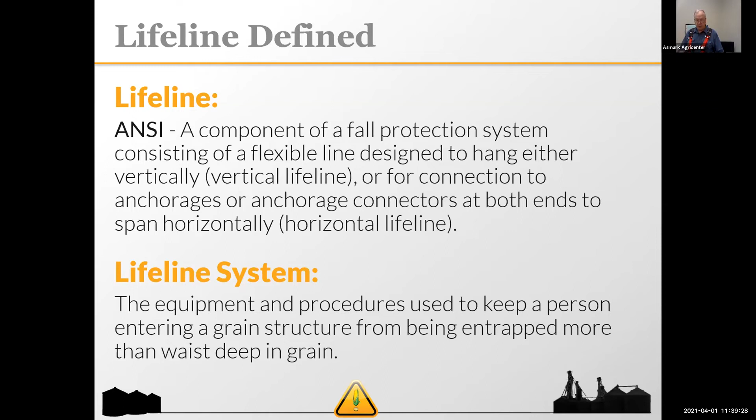A lifeline is a component of a fall protection system, designed to hang vertically, supporting you from the top center of the bin. If something takes you down, it holds you up and keeps you there. There are connectors at the center and at the wall. The equipment and procedures are designed to keep you from becoming entrapped no more than waist deep. Here you can see a slide of all the components and parts.

We try to always be within line of sight so we can see each other, or at least hear each other. When we're working in the bin, we want a maximum of 2 feet of slack in the rope, so if it's 3 feet from the surface of the grain to your waist, you've got a 1 foot safety cushion.

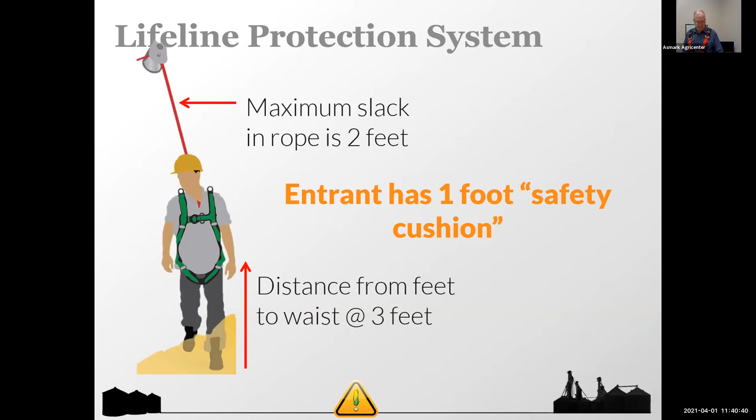In the picture, it shows the lifeline attached to the back of the person. I prefer it on the front so I can manage it and maintain the slack. It's personal preference how you want to do that.

It's protection — it prevents the entrant from sinking more than waist deep into the grain. It prevents a fall if the grain surface, say you got on a crust and the crust went out from under you, would protect you from going down in.

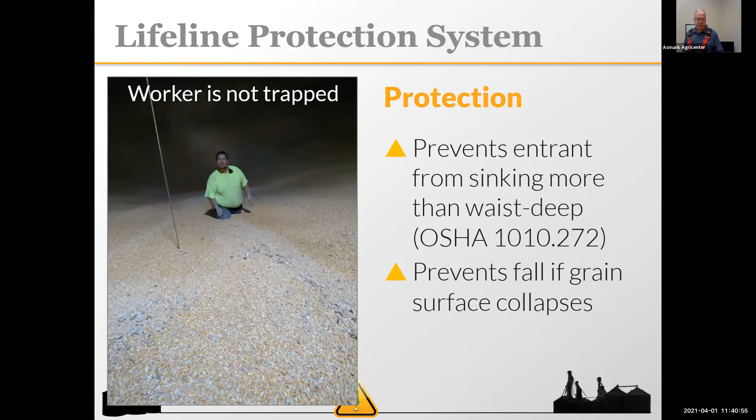So, the lifeline components: we have a full body harness. This is a class 3 harness. It goes over the shoulders, around the waist, and around the legs — that's the 3 points, the 3-point harness.

We're going to use a knot passing pulley, which is permanently installed in the top of the bin, and a lifeline rope, a life safety rope. This is not a product you go to your local farm store and purchase — these are bought from safety equipment people because this is life safety rope. So you want those components, okay?

Sidewall anchors are permanently installed. We're going to have slings, carabiners, and belay devices.

Here's the class 3 full body harness, showing you an example of how it distributes the weight. Here's the knot passing pulley — this is attached at the top of the bin at the peak, allowing the ropes and knots to pass through and come back to you where you're working.

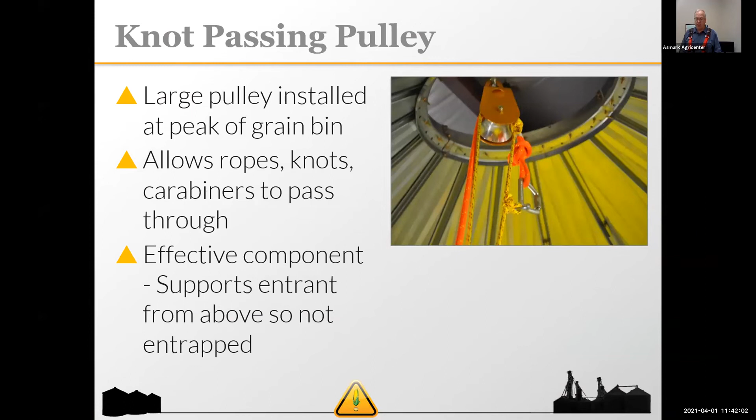If something happened, this is what supports you from the center of the bin to keep you from going down no more than waist deep. This is a lifeline rope, 7/16 inch, which we consider for 1 person; 1/2 inch diameter is considered for 2 people.

Static kernmantle — this is a rope rescue, a rescue quality rope. It does have some stretch to it, which helps with absorption and shock.

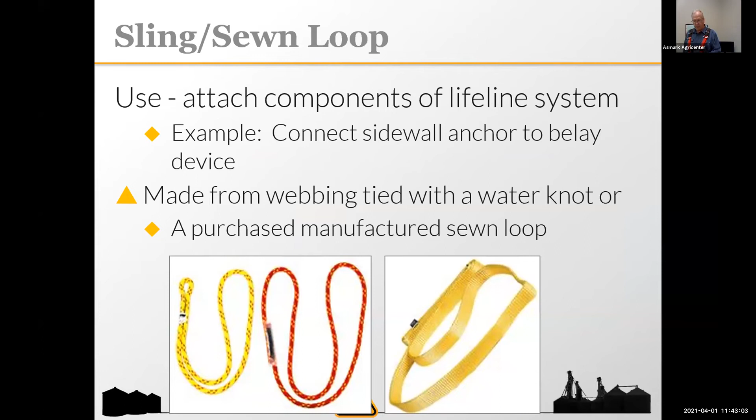Some slings and sewn loops — these are used when we attach components like the belay device and the anchor. We need some kind of soft link between components; we don't want to go metal to metal. They can be pre-sewn loops, as you see on the left — those are manufactured. We also have a loop made of webbing, and you can also use webbing tied with a water knot.

Carabiners — these are an oblong metal ring, a connection device, things you would use to connect your rope to your harness. They give you the ability to quick connect or disconnect.

And then the gate is automatically locking so that once I've clipped in, I let go of it and it stays locked. Things like that.

Here's a couple of examples of belay and rope grab devices. These are mechanically oriented. This is what the person at the entrance to the bin would be operating to allow the entrant who's inside using to control the amount of slack they have. It's an active device. The important thing to understand about this is that if something goes wrong, it's simply hands-free. Let go of it, it locks up and the person does not go down into the grain. It's important to understand that when things go wrong, let go of it. Sometimes that's hard to do, but that's the key point: if you go hands-free, it locks up and holds you.

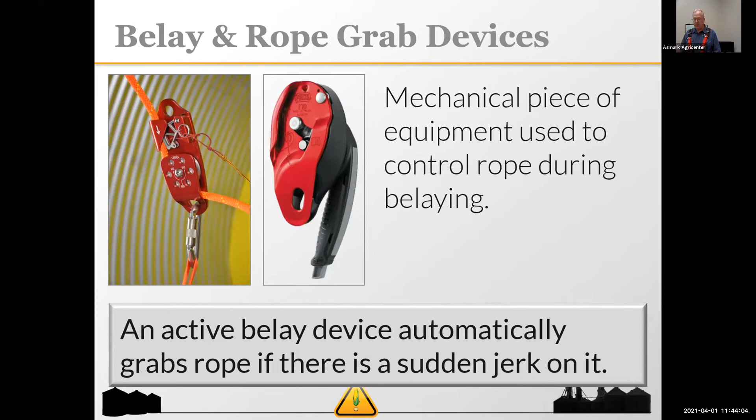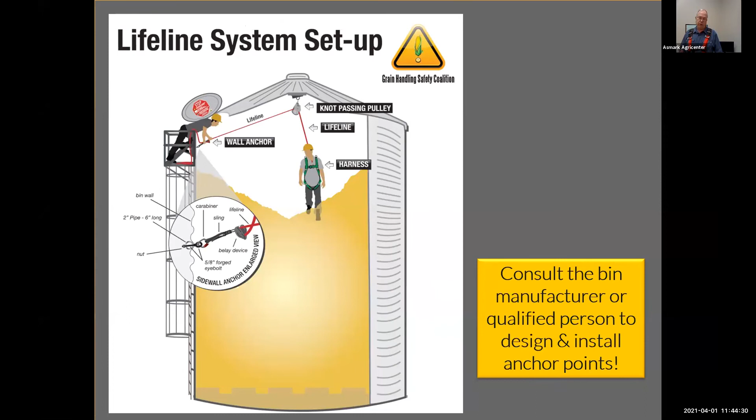Here, once again, we see the setup. The person's inside in their proper harness, got the lifeline and knot passing the attendant out here. And you can see another example of the sidewall anchor. Consult the bin manufacturers about your anchoring of the roof and all that for the pulleys. There are design systems out there, but above all, talk to your bin manufacturer to know what your roof is rated for so that you can get things set up properly.

Okay, so now the entrant and the observer, their roles and responsibilities. Once again, this is a 2-person process. Once again, breaking that culture. We're using the lifeline to prevent an engulfment. We're going to talk to each other as best we can.

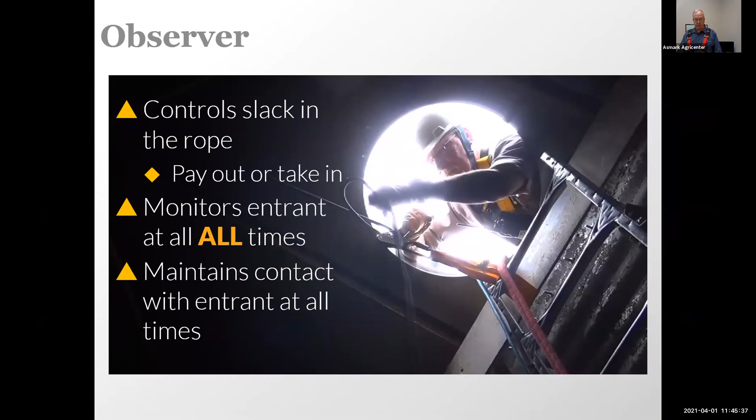The observer, his or her job at the entrance is to control the amount of slack that's in the rope. And this can sometimes be a challenge, but we pay it out and take it back and forth, monitoring and trying to keep an eye on the person inside at all times and watching what they're doing.

So once again, it's a best practice for all. It's required in commercial settings. It protects against being engulfed or entrapped. There are 7 basic components to it. We're going to go out here and do a little hands-on real quick, and we'll review them so you can see them. It's anchored at the peak, the observer manages the slack, and it's not real big in dollars. So I'm going to transition now to the training area where we're going to do the hands-on, and I'll be back with you in just a minute.

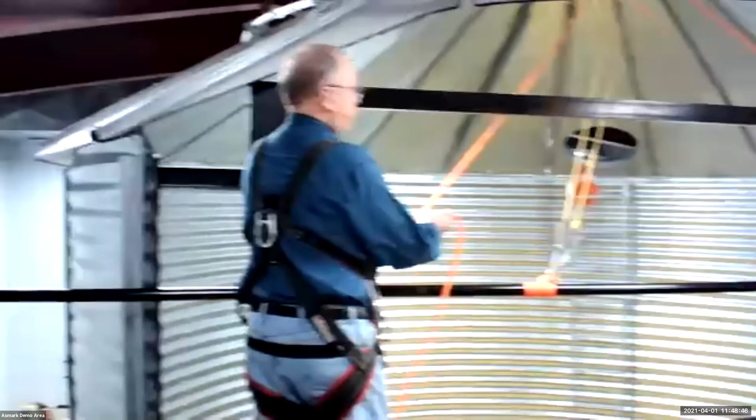What I can do is adjust the rope as he walks around, this way. When he needs more, I can just release it like so. But if something were to happen, all I got to do is let go. Just kind of walk that way, John, a little bit. All I got to do, this locks up, and now he's in position, and he's not going to go below waist deep.

This is the lifeline in its entirety, really and truly. This is how it works. It can be this simple. If he was in the bin walking around, we would try our best to maintain visual, above all verbal, so that we're talking to each other and he has what he needs.

If I see anything, if something goes wrong, he maybe hits a little pocket or something, goes in waist deep, my job then is to call 911, start the rescue procedure. But I do not, under any circumstance, go in the bin after him. Then we got two people to deal with, okay?

We also know that this is breaking the culture of people working alone in grain bins, especially on a farm, because we know of many instances where people have sat there for 3 or 4 hours and nobody checked on them until it was time for supper. I personally know of a gentleman in central Illinois who has been buried in a bin 6 times and survived. So some people still don't get the memo.

The point is, if you've got to go in, go in safe. Don't go alone. It's the last resort to go in the bin. Above all, have somebody with you and have a system, because this is back to everybody goes home. This is also part of lockout, tag out, and everything else. Even if I'm going in to work on machine guarding, I'm going to be in a lifeline depending on the situation. Okay, so that's it in a nutshell.

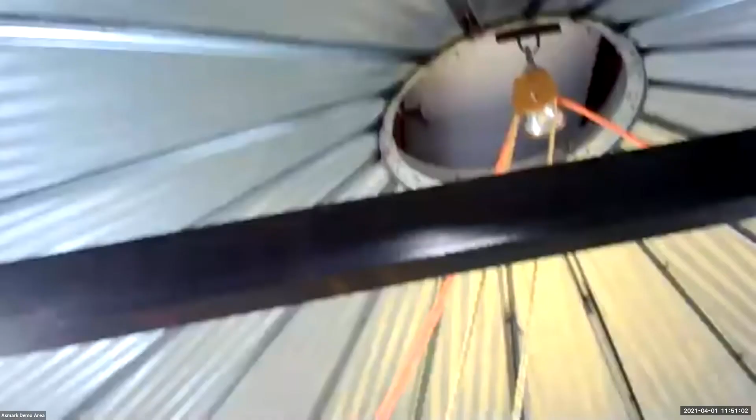Well, you can look up at the top of the bin, if you can see right there at the roof. Well, that bar might be in there a little bit, but once again you can see the loop system. This was an engineered anchor that was installed in the roof of the bin. This would also be fall protection if you were coming down the ladder on the inside.

Technically, we'd be on the other side, but this is just for demonstration purposes, a whole lot easier to be able to see. But this is how it would work. John would be inside coming down the ladder, then I would be at the open, we'd be on the opposite side. And what's your anchor? What's your anchor strength need to be up there?

2 to 1, 2,000, 2,000 at least. Yes, and I know that was a long argument with a lot of folks about determining that. So, but this is the whole system. You know, the most expensive part is probably the rope.

It's one time, it's not used for anything else other than this. It's a life safety rope. So it comes out of the bag, we tie the knots at that time, you put it together, it's your rope. It'd be just like your lockout tag out. This could be your rope because your life's depending on it.

So with that, we can open up things to question and answer across the board.